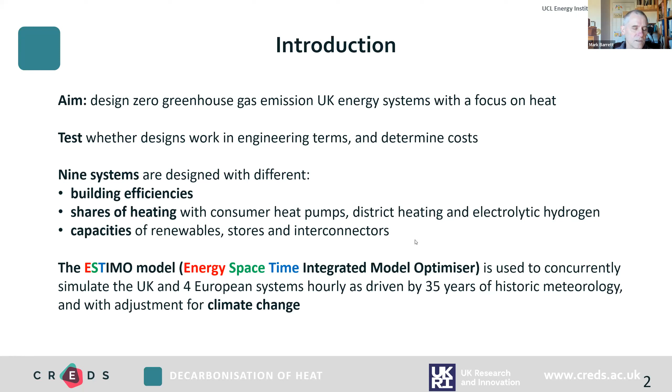Yeah, so we designed 9 systems with different options of heating and different capacities of different components. And as I'm sure you all know, the basic problem is we have variable renewables here, which will be the largest contribution of zero emission energy supply. And of course, solar and wind have no integral storage. So given the hourly variation in demands for energy driven by social activities and the weather, we need to come up with a system of storage and different components to reliably meet demands hourly.

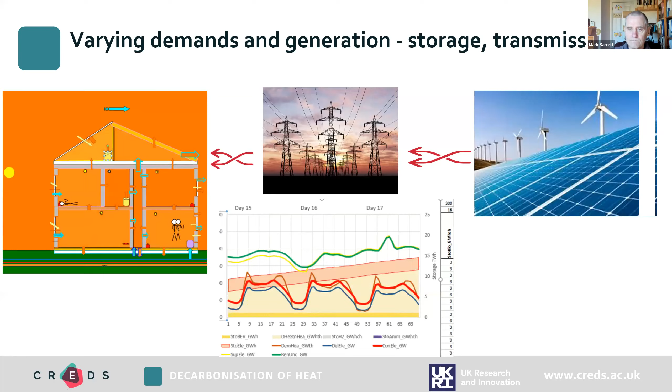And the thing is that these energy systems apply at all scales, from the building or even the heat pump system through to city, through to national systems and international systems. And these different scales are important because there are options, for example, internationally, which will reduce costs at the local level.

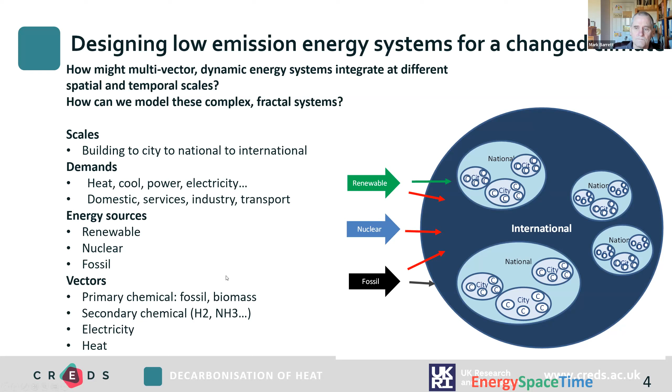So we looked at the main primary energy resources and the main vectors considered. And we tried to come up with designs which were partly informed by optimization, but to quite a large extent by manual exploration of different designs. So given a set of energy services, how much can we change the service levels with efficiency like insulation? And how do we harness these primary sources utilizing different conversion devices like heat pumps or electrolyzers, coupled with storage of different kinds and interconnector capacities?

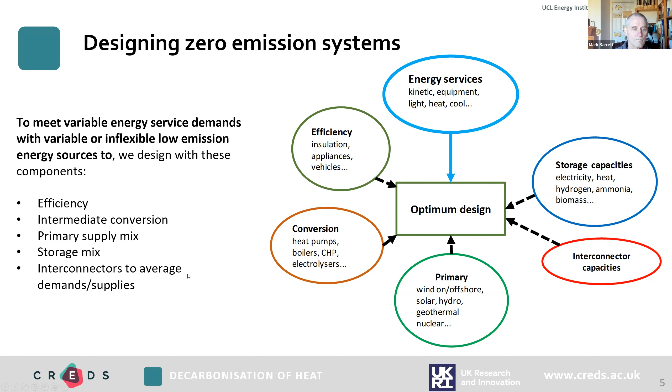So we focused on renewable solar and wind resources because these are indefinitely large and you can supply any amount of energy that the UK might require, and indeed Europe. Whereas biomass and hydro and geothermal are important, but they're very limited in the UK, apart from say a country like Norway, a small country where it's nearly 100% hydroelectricity.

We excluded new nuclear power beyond Hinkley for reasons of waste and cost and generic risk, so we've just assumed there'll be 3.2 gigawatts in our long scenarios. We've excluded fossil fuels completely because they produce greenhouse gas even if you have carbon sequestration, and that has to be balanced with negative emissions. And we've reserved biomass for aviation fueling as there's no kerosene substitute.

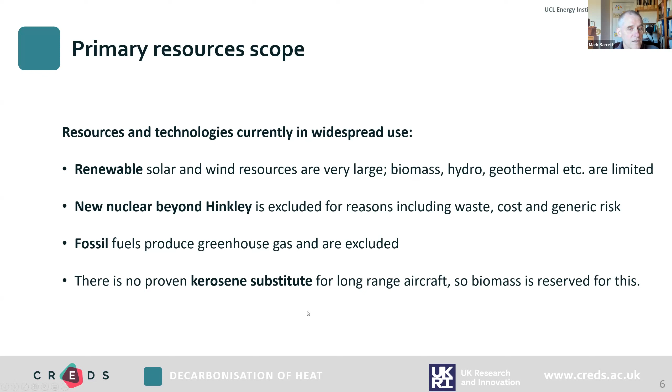The starting point with our modeling is always looking at energy service demands. So we have detailed modeling of the different types of demand: lighting, cooking, water, space heating and cooling, and so forth, in the three stationary sectors: domestic, services and industry.

And then in transport, we have road and rail and ship ammonia fueling. And these demands vary partly by socioeconomic activity patterns, which we have a lot of detail on, and also for heating and cooling and lighting by meteorology. Heating and cooling, by the way, it's not just buildings, but vehicles, also electric vehicles, which are just buildings on wheels, basically.

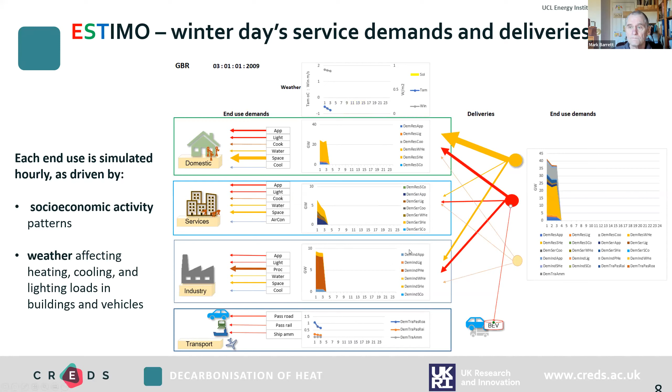Then we might use electricity to make hydrogen with electrolysis and use that with the Haber process to make ammonia for fueling ships. We haven't really done aviation fueling yet, it's more complicated. And then of course the electricity can be directly used in electric vehicles and heat pumps and so on and so forth.

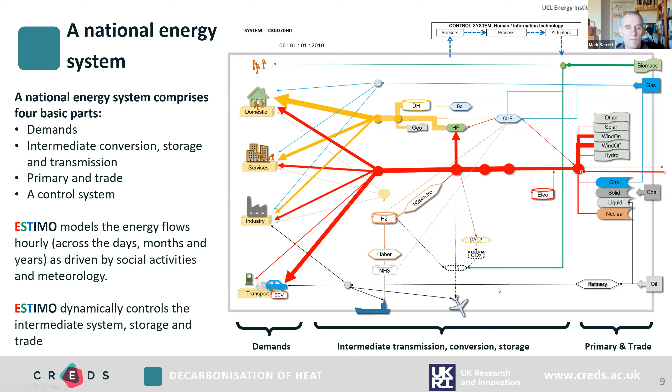And so we run this national model here. We run 5 of those national models concurrently, at the same time, for 4 regions of Europe and Britain. So we're running 5 national models and then looking at the trade between them.

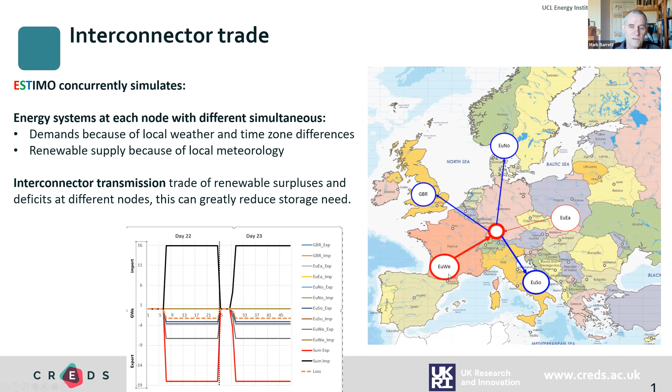And obviously the wider your geographical spread, the more that demands are evened out, partly because of meteorology and partly because the clock times are different as you go east-west, and also because the renewables are averaged out. So at one point you might be exporting from Britain to, let's say, Eastern Europe. Another time you might be importing into Western Europe from Northern Europe.

And perhaps one of the most difficult parts of this was the algorithm to control these flows of energy, both within the countries and between countries, between their stores of energy. So we developed this global optimal dispatch algorithm, GOD for short, which controls the whole system internationally and nationally. It's an algorithm, but it could be a proof of concept for a dynamic energy market, which is one of the complex things we need to look at.

And the basic algorithm has 3 phases. Phase A, you try and meet your demands locally using your current renewables. And if you have too much, a surplus, you try and store it locally. If you have a deficit, you try to meet the demands from storage.

And that leaves each node with demands all met, or a surplus or a deficit. The second phase is to trade surpluses and deficits between the countries or regions, again using surplus uncontrollable renewables and trading to and from storage, within the transmission capacities.

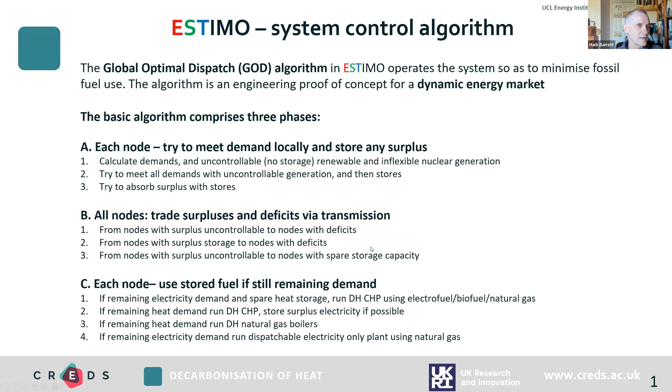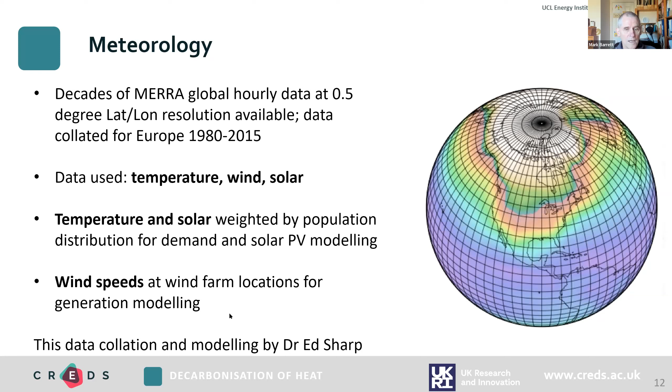We've collated 35 years of MERRA data: temperature, wind, and solar. The temperature and solar data are weighted by population distributions for each country. We use that temperature data to drive heating and cooling demand, and solar for driving PV modeling, assuming it's near to population. And the wind speeds at wind farm locations for generation modeling there.

We had a look at the climate projections because, as Tiziano will show you, we investigated the implications of increased temperatures due to global warming and the effect on heating and cooling.

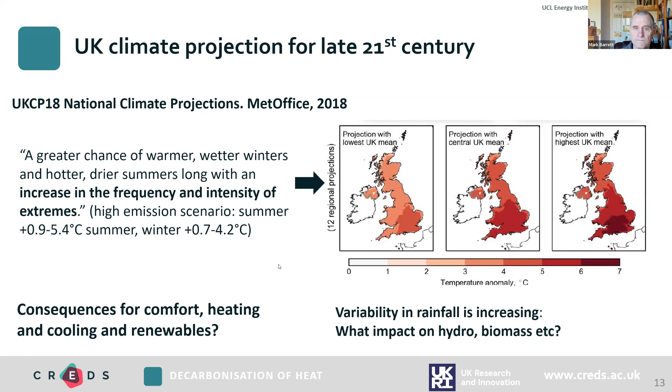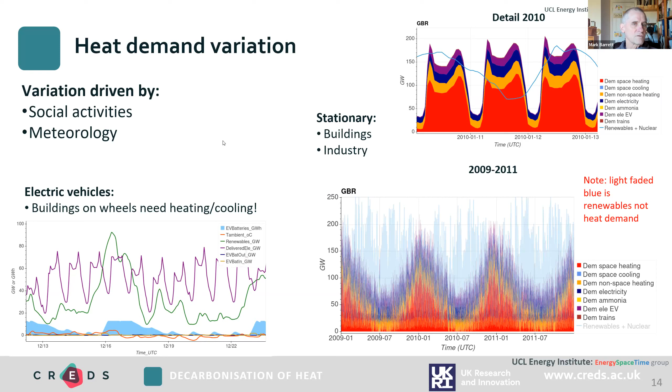And as you've seen, here's an example of primary energy, but you'll have seen all that—an example from the MERRA data used to drive the generation calculation.

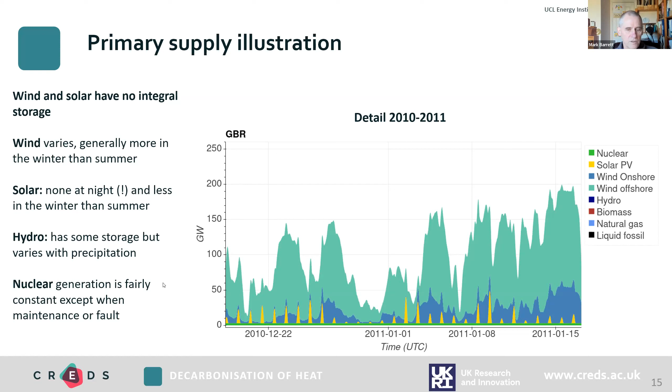And then finally, heat demand. We looked at heat demand as important because about half of UK CO2 emissions are from heating, and this fraction is increasing. As electricity decarbonizes, you're left increasingly with natural gas, which has CO2 and methane emissions. So about half of CO2 or greenhouse gases is from gas heating, and so we looked at future heat demand.

We assumed conventional heating systems, but one of the things that should be looked at is personal comfort services—rather than heating or cooling the building, you heat or cool the furniture that you sit on.

So I'll stop there and hand over to Tiziano.

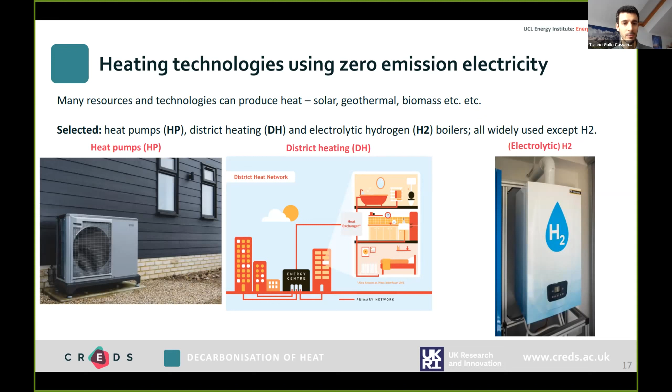So we focused on these three technologies, and we created 9 zero emission designs of the whole UK system. We had three core scenarios where the majority of the heat was met by either district heating, heat pumps, or hydrogen boilers, at 70% of the heat share, with the rest by consumer heat pumps or district heating.

And then we also created 6 designs where we used the district heating heat share just as a reference, and then we changed all other parameters like building insulation, generation capacities, and interconnectors. We also looked at a couple of scenarios with increased temperature due to climate change.

And so each of these scenarios have different capacity for storage, interconnectors, and renewables. We manually built and refined these scenarios in order to create systems that have zero emissions.

For example, the first 3 scenarios, shown with the blue shade, have different storage sizes. For hydrogen boilers we have around 50 terawatt-hours of hydrogen storage, while for district heating we have around 40 terawatt-hours of storage, plus some storage grid which is common across all the scenarios.

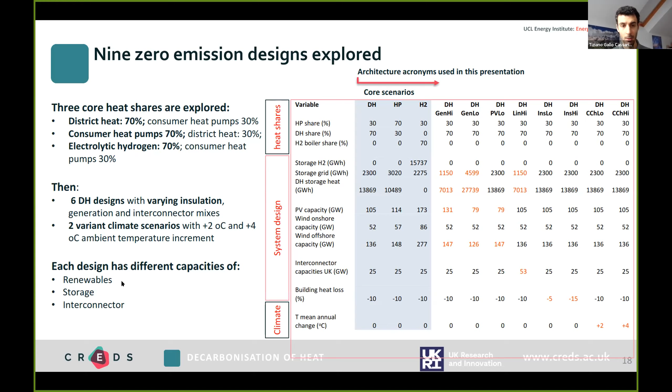So changing the temperature, the average temperature across the year, means that the heat and cooling demand also change. In the core scenarios, the total heat demand is around 460 terawatt-hours, and this falls to around 400 and 346 when we increase the temperature in climate change scenarios by +2 and +4 degrees.

What changes in particular is the sensitivity of heating and cooling. Looking at building insulation and climate change, we saw that heat demand sensitivity decreases by around 30 terawatt-hours each centigrade, while electricity demand for cooling increased by roughly the same amount. We also see a slight decrease in electricity demand for road transport.

In the other couple of scenarios where we changed the building insulation level, we saw a decrease in heat demand of 3 terawatt-hours for each fraction of heat loss, and for cooling we saw a change of half a terawatt-hour.

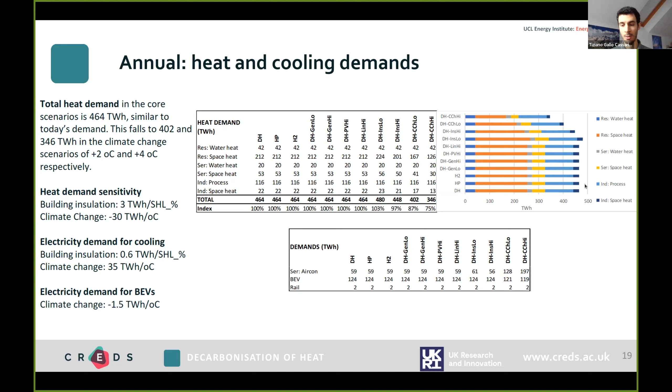One advantage worth mentioning is that technologies like heat pumps or district heating are more resilient against weather and climate change, because they can provide cooling as well, so they offer more resilience.

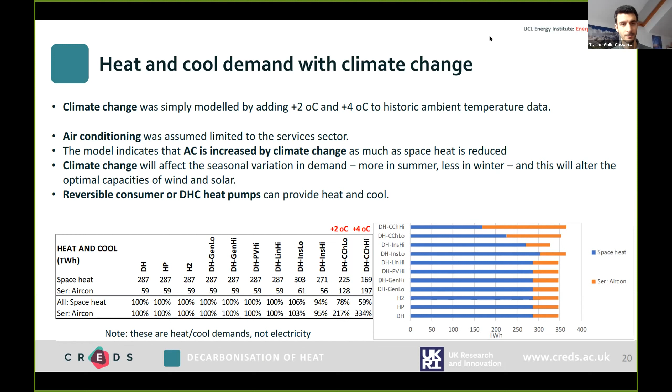Moving to electricity demand, across the three core scenarios - district heating, heat pumps, and hydrogen - the main difference is that due to reduced efficiency in electrolyzers, hydrogen boiler designs require much more electricity, about 4 times more than the other core scenarios.

This is because the whole supply chain is a bit less efficient when we look at green hydrogen. We look at the consumption of electricity not just by the consumer, but also by the intermediate system - electrolysis, the district heating pumping system, and losses in storage and transmission.

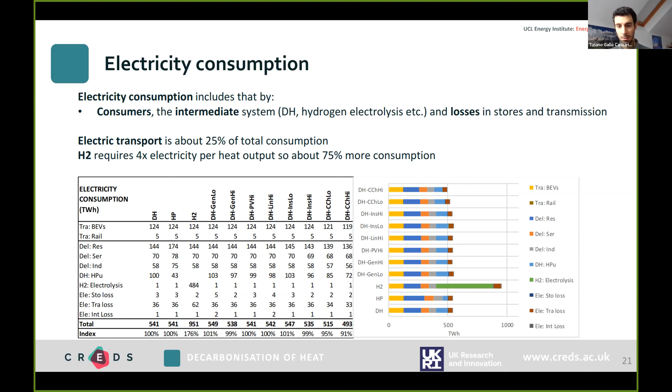As a side note, electricity for transport across all scenarios is about 25% of total consumption, so it's not trivial. What happens is that the electrolyzer needs around 500 terawatt-hours of electricity demand in an average year, which almost doubles - a 70% increase in total electricity demand.

This also means that in the hydrogen scenarios, a large heat share from hydrogen boilers requires a lot of primary supply capacity and other production, which translates to 80% more capacity compared to the district heating and heat pumps scenarios.

One thing we notice across all scenarios is that since we need a quite high capacity from renewables anyway, the spillage across the year is between 40 to 50%. We could decrease the spillage, but then we'd need to increase storage capacity or interconnectors to balance the reduced generation capacity, or add an auxiliary component running on other synthetic fuels. But again, there will be a need to produce electricity anyway.

Another side note is that since we need this high capacity for electricity production, the UK is able to export electricity to Europe.

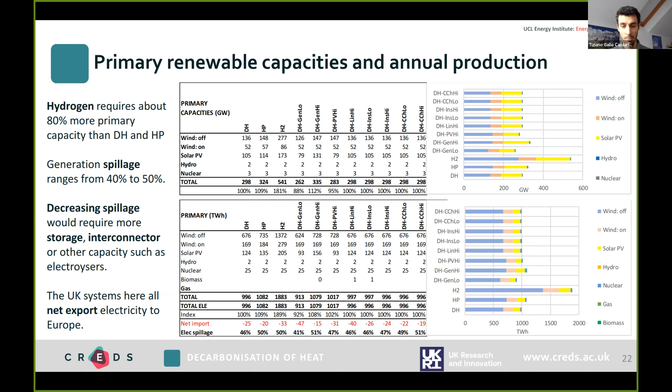Here we wanted to show what happens across the simulations we performed with ESTIMO. Before I was talking about annual data, now we can see what happens at hourly resolution. This example shows simulations where we ran 3 years of continuous weather data, and we watch what happens in the system - these are hourly flows for storage, storage level, and demand.

For example, the top one is the heat demand provided by district heating using heat pumps - the blue lines - then some from storage, the orange, and there is some spotting there with CHP when ammonia is used.

The pink line is the heat storage level. Across these 3 years, the storage basically has a seasonal pattern. In winter we use more storage, and in summer the storage gets charged.

But across these 3 years there are different periods of heavy storage use. In particular, 2010 was a bad year because there was low wind and low temperatures, so at the beginning of 2010 there is a significant use of storage. We use around half the storage in a couple of days.

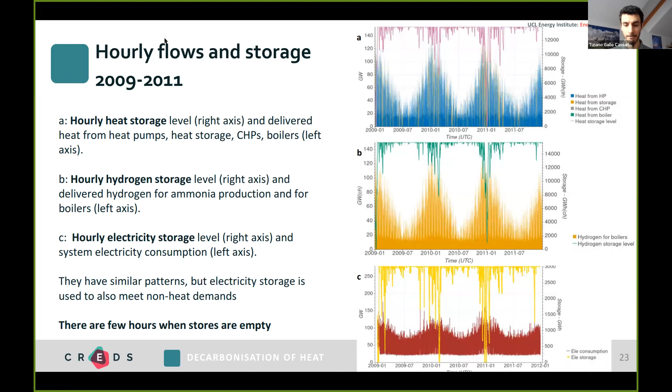Going forward, since I talked about storage, basically what happens is that increasing storage can allow us to decrease renewable capacities or interconnectors, and vice versa. So we need to take into account the whole system to really design a resilient energy system.

For example, in the case of hydrogen, total storage is much higher because the system is a bit less efficient, so we need more backup solutions. Increasing the scenarios where there is higher generation from renewables or more interconnectors needs less storage, because there's more capacity available, and therefore storage is less used, even in periods of low winds and low temperatures.

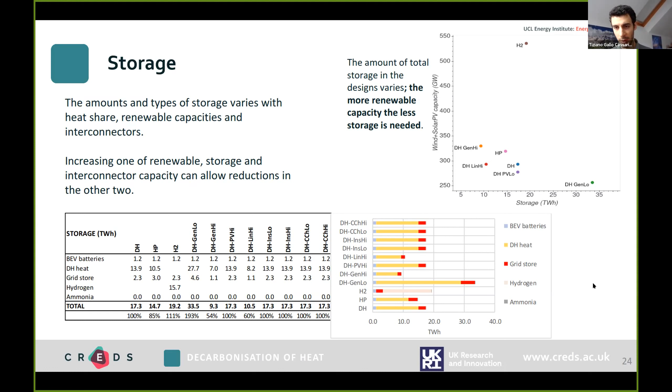So now we will look a bit about the cost. We calculated this for those scenarios, looking at the capital cost, which are unitized using technology unit cost and lifetime, and we assume a 5% interest rate across the years.

On average around 35% of the total cost. So again, the hydrogen scenario is a bit more expensive than the other two core scenarios, district heating and heat pumps. This also translates to the electricity cost for an average consumer, in pence per kilowatt hour, which is slightly higher in the hydrogen boiler scenario.

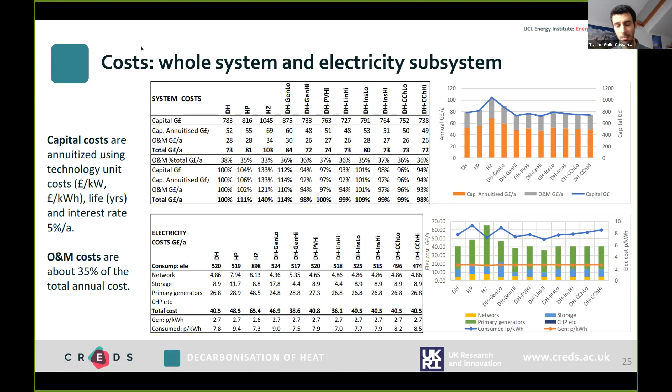Given that the other costs are roughly the same for the networks, even though for heat pumps and hydrogen these are a bit higher, the total cost for the hydrogen system is a bit higher, followed by the system with heat pumps, because the cost for consumers is a bit higher since they have to buy all the heat pumps for their premises.

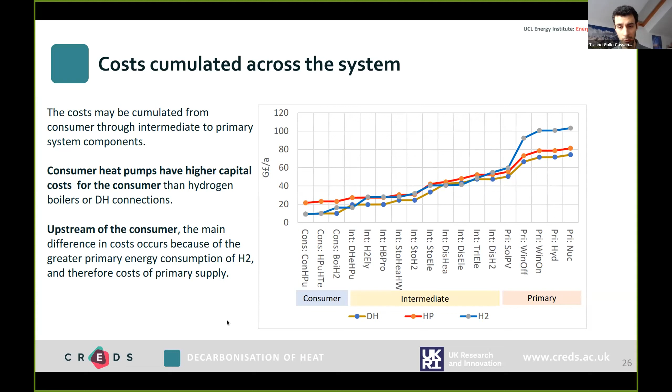So if we accumulate the cost through all the components, consumer heat pumps have higher capital cost for the consumer than a hydrogen boiler or district heating connection. But then there are other costs upstream of the consumer, and the main difference occurs because of the greater consumption of the hydrogen system, and therefore the cost of supply are also higher.

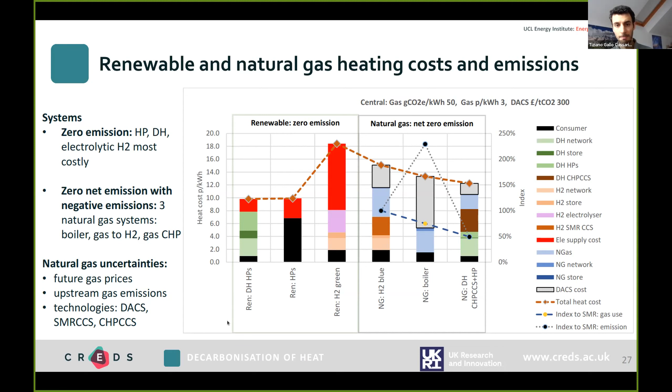We didn't check electricity failure because periods with low wind would incur a much lower production of electricity compared to some technical fault in the system or an attack, because the generation is distributed over a large geographical area, and also in the case of district heating, for example, or consumer pumps and boilers, all the systems are distributed.

The unit capacity we used in the scenarios was around 5%, so it was very small. We could argue that we can have other measures as a backstop capacity to reduce the risk of low supply, using, for example, some gas turbines, like 100 gigawatt. They would add around 4% of total system capital cost and 2% to the annual cost.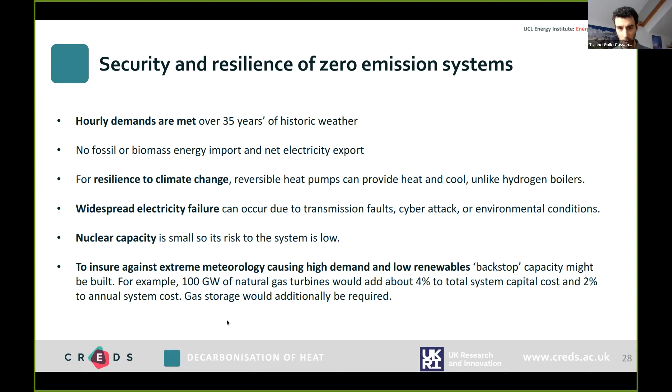But in that case, we will need natural gas storage, for example, to retain the existing storage properly. So in summary, through this project, we looked at different zero-emission systems that we designed to have commercially available existing technologies, except for hydrogen boilers.

And we saw that these three technologies, the green hydrogen boilers, would be the most expensive because they require much more primary capacity from renewables. And what we can see is that all these systems will require major changes either on the consumer premises or on the whole system along the supply chain.

Since we manually designed this system, these are not the global optimum, but still we managed to minimize all the components of the system to create a system with zero emissions.

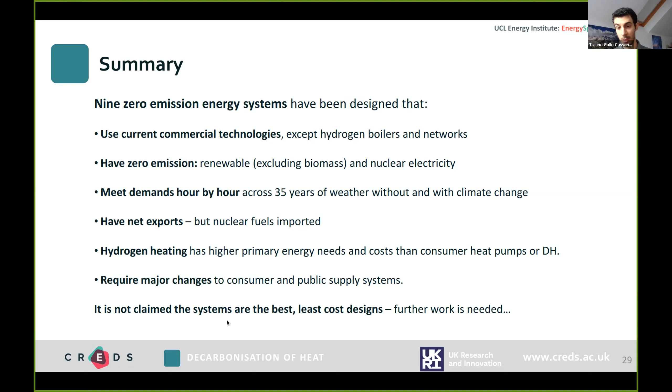The next step we are considering is to include the production of aviation fuels and look at negative emission technologies like direct air capture, increase the detail of the modeling on insulation and efficiency, and look more in detail about industrial applications for hydrogen, like for iron and steel, and incorporate district heating and cooling into this.

Integrate district heating into this system to see the advantage of these solutions, and perhaps look also a bit more about passive measures to decrease demand, like fabric improvements or other batteries at the consumer premises.

And of course, then the question is to understand whether modeling a system with a wider geographical scope, connecting Europe to Africa or Asia, would decrease the requirements for the European system, and also see how we could optimize the system automatically to find other least-cost or least-emission systems.